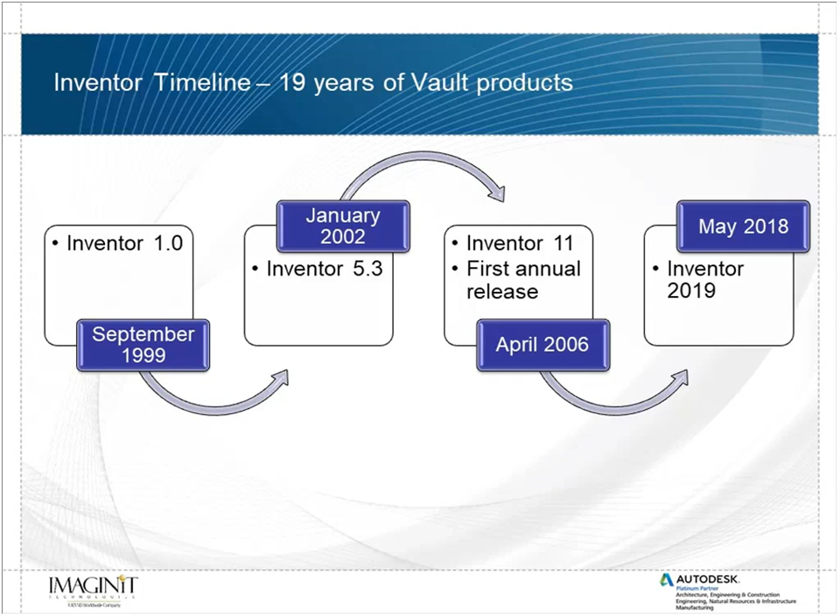It's always interesting to me to look back and think about the different tools, how they've changed and what's been updated over that course of time as we've gone through.

I'll talk a couple of things about some of the enhancements and where they come from. If you're not using this today, there's a tool on the forums called the Inventor Idea Station. Many of these enhancements are directly from customer requests, where customers had suggested something, maybe taken a look at a particular tool and said, oh man, it'd be great if... That's where a lot of this comes from. So I really recommend that if you have an idea, take a look at this Inventor Idea Station.

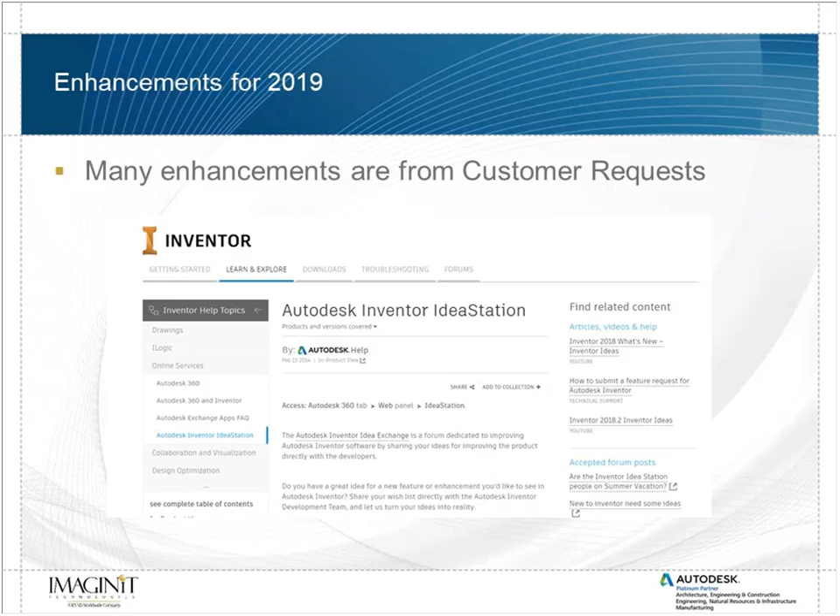Put your idea into practice. I have a lot of customers who ask me, can you tell Autodesk it'd be great if I have exactly the same feature you do? So go here, put your information in, and then you can send that out. You can give ideas kudos, so the more kudos something gets, the higher it goes up. Inventor's fairly responsive. A lot of times we'll see things show up and get a good response, pretty quickly get implemented into the software. When we say quickly, it's within a few releases - usually there are several releases out - but it's a great thing to communicate your concepts directly to Autodesk.

We'll start taking a look here at some of the new features within 2019 and some of the different tools that we can access. One of the first ideas of Inventor 2019 is how it's connected.

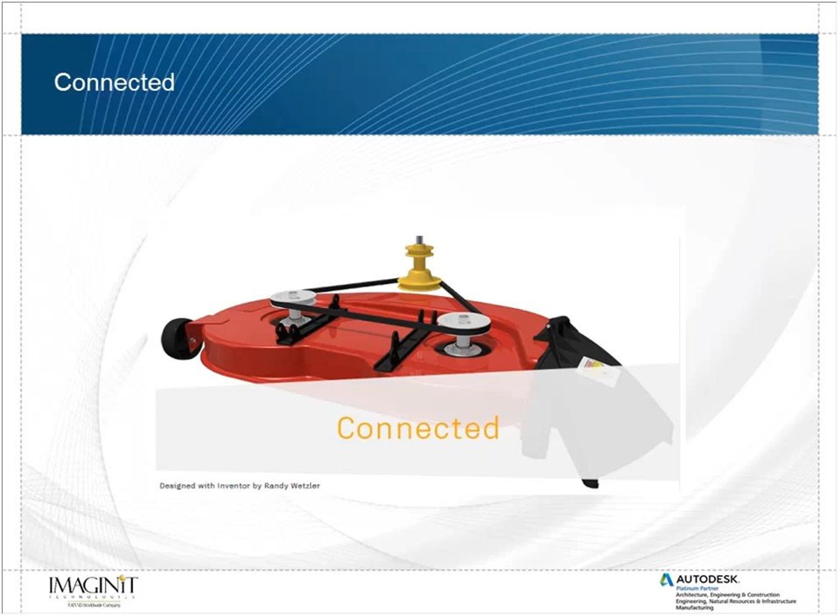I talked about this - it's a recurring theme within the 2019 products, because if you were on my Vault webcast yesterday, you heard a lot about this type of thing. The idea of shared views: to create a visual representation from within the desktop and give it a link that people can view. We've been doing this type of thing for a really long time.

We said, well, we've got a particular component, we're going to share this out to a DWF file, and then I can email that around, which is great. DWF files are a very powerful tool, but the shared views doesn't use DWF files - at least I don't think it does. I'm not sure what it uses.

It's all done online, so there's a tool, and I'm just going to share my desktop here real quick. At least I think I am. Yeah, here we go, so I'm going to share my desktop.

I'm going to jump over here. So here's Inventor, but I'm actually going to jump to Chrome real quick, and I'm going to go to this website, viewer.autodesk.com. This website, I'm going to suggest you take a look at if you haven't already.

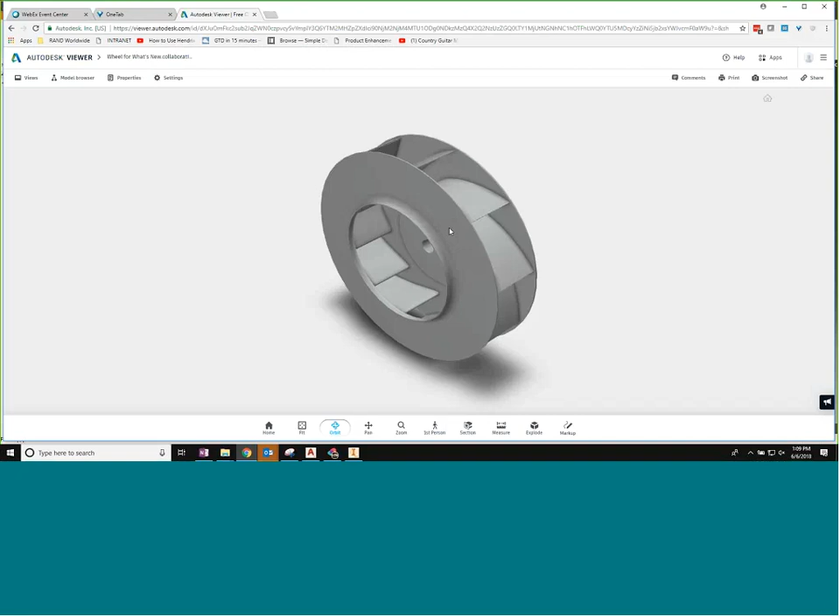It is definitely worth it - I'll go ahead and click Get Started Viewing here. I'm logged into this account, so these are views that I've generated already, I was generating them yesterday. I'll show you how this works. The idea is I can upload a viewable directly to this viewer.autodesk.com, it's all based off of my information. The viewable gets placed right into here. I can go see it, and I can take a look at it.

I can even come in, and if I've got this enabled, I can begin taking some measurements off of it. I can see distances and depths and some other things that are available for that. And I'll delete my little dimension there. So there are some tools available within the Autodesk products that allow me to come take a look at this.

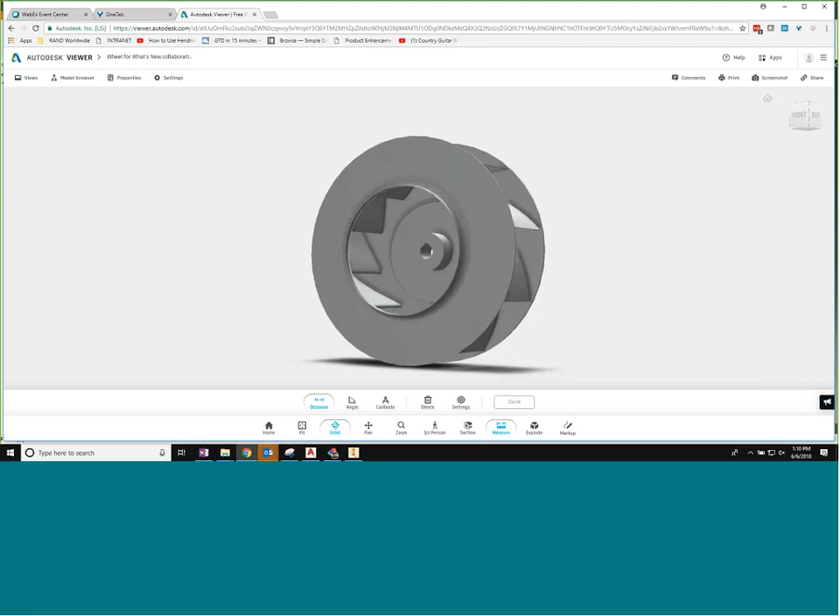I'm going to jump back here. I've got a drawing that I've loaded in, and again, this is right from the tool that I can send this up here. You do not need anything installed on your desktop to view this. This can be viewed in any browser, and it can even be viewed on mobile devices.

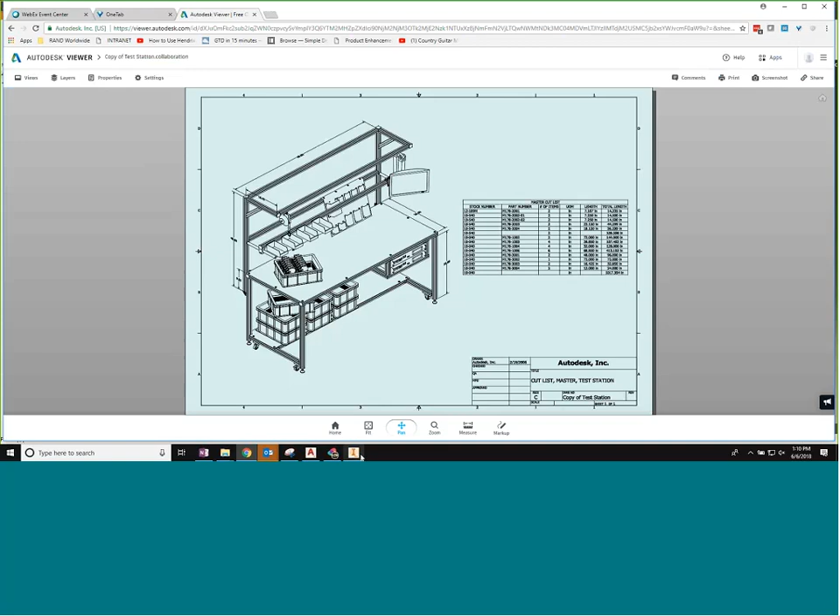Back here in Inventor, I'm going to go grab a component. Let's see, not that guy, not that guy. We'll grab this one. I'm just going to open up this piece right here real quick.

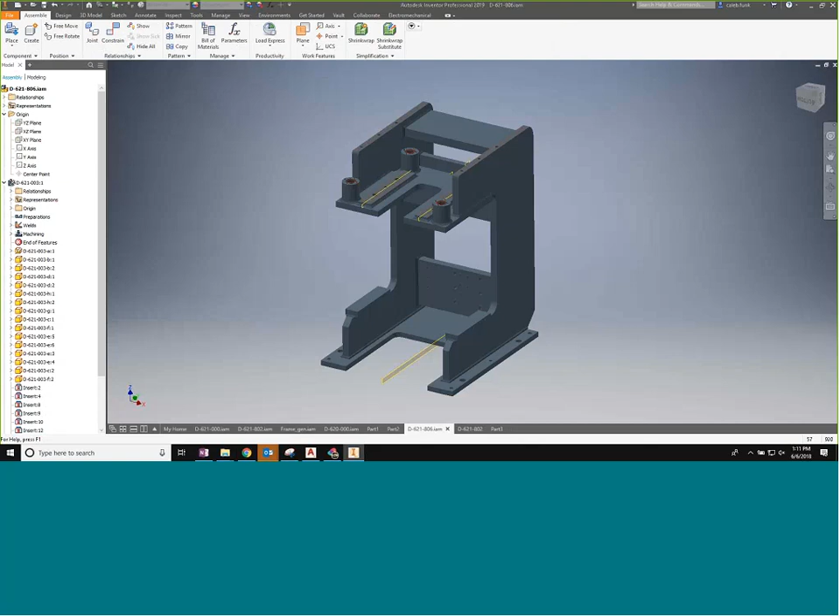If I want to, I have some options of how I want to work with this. In this assembly, you can see I've got my weldment, my different features, my different pieces that are in here. I'll go ahead and send this whole thing. I've got a collaborate option, and I'm just going to go to my shared views, and it's going to show me the shared views that I currently have. Those are the ones I was just looking at.

So I've got the wheel, and I'm going to create a new shared view of this one. I've got a few options. I can hide component names, I can hide part properties, but I'm just going to go ahead and share that.

It's going to process it here in the background, so it's going to take a few minutes to push that up. But once it's up there, it's a link that I can share and send to people, and it's not going to require anything in terms of a viewer. So you don't have to have Design Review, you don't have to have TrueView, you don't have to have anything. So now I've got that up there.

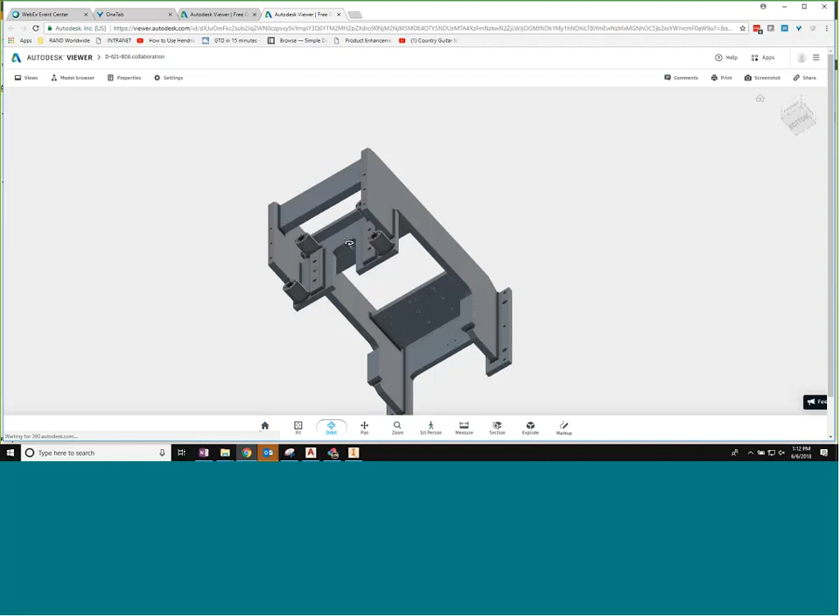I'll just go ahead and view it in the browser. So now it pulls up my Autodesk viewer. There's my information, so okay, I can come in and see that. There's all the info that I just sent to it.

It even has a model browser in here, so I could come in and turn different components on and off. I can go view specific components that are in there. Again, I can turn those off if I want to.

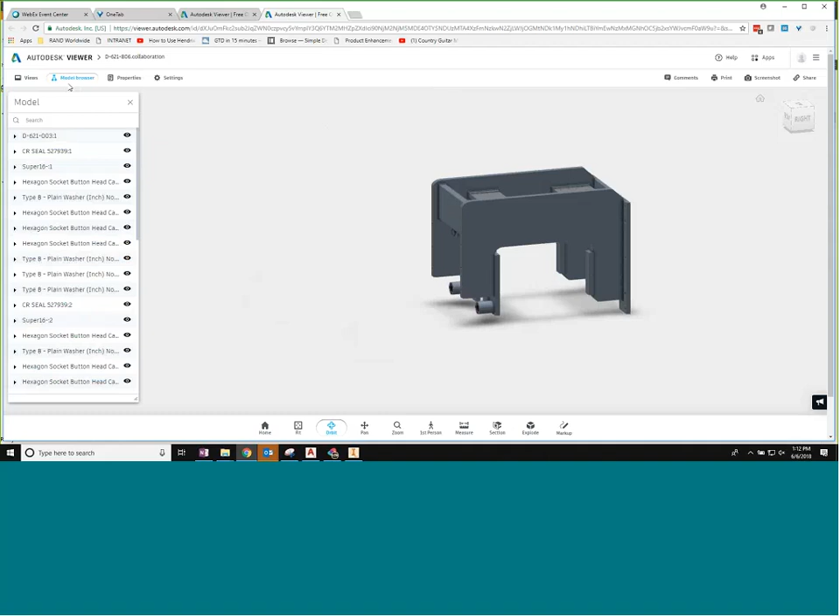The control that you have and the fact that this viewable is out here is really, really pretty cool. If I take a look at properties of a particular component, I can get its name, its appearance, whatever other properties I want to associate to that. All of that is built right into this. And I don't have any scenes or views in here, but I could pull those in as well.

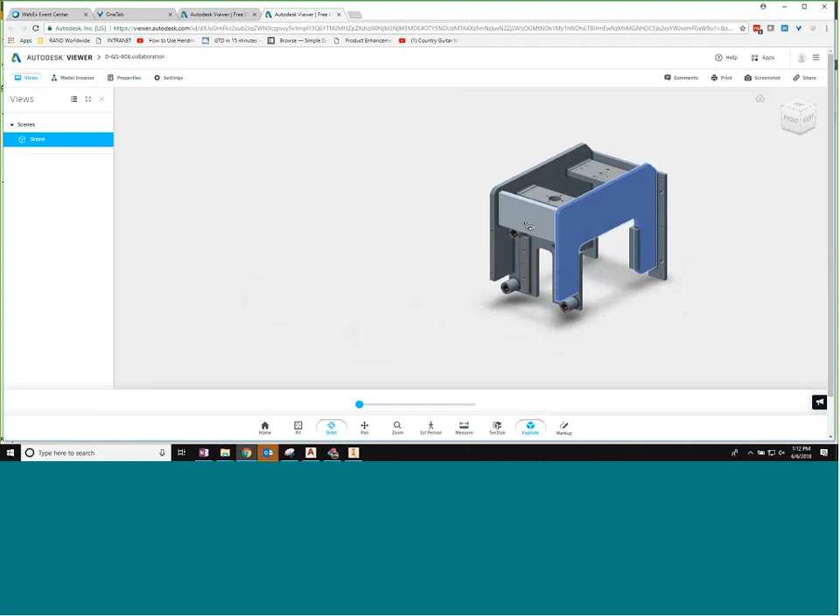So what a great tool to have, built right into a web client. And again, you could view this on an iPhone. I was playing around with that yesterday, and you can take a look at that on the iPhone.

So this is just part of the new Inventor tool suite that we have, the idea of shared views, and then I can publish out those shared views. These do automatically expire in 30 days, and I can extend it or I can delete it.

So if I want to share that with someone, all I have to do is copy the link. So I'll just copy the link that I have, and then I'll drop back into our WebEx meeting here. And that's something that I could then send out to everyone if I wanted to. So I'll just send that link out. So if you wanted to take a look at my information, it's pretty straightforward to jump in and take a look at that. And it's a great, great tool that we have.

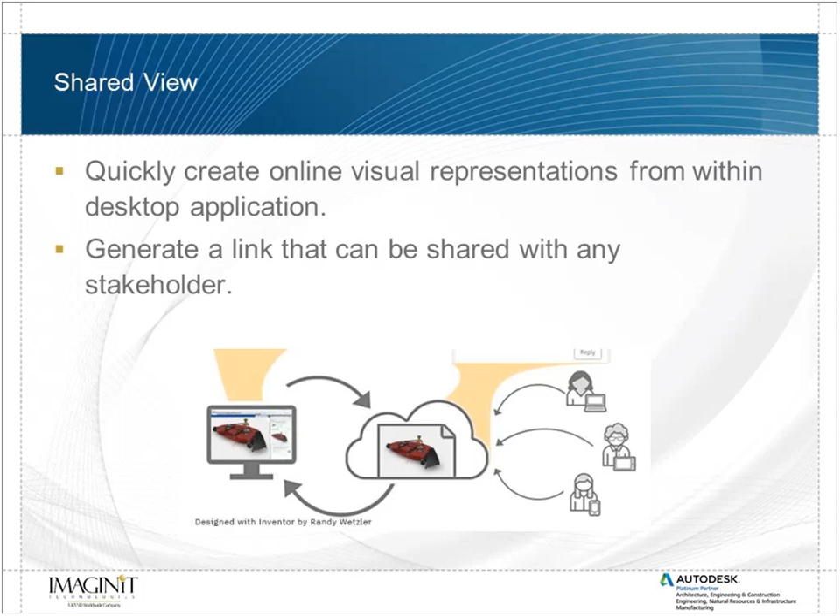That's not the only connection tool that we have, though. There's also Autodesk Drive, and Autodesk Drive has been around for a little bit. But now it's getting deeper and deeper integrated into the tools where we can send files directly to Autodesk Drive. It's a subscription benefit, so this is allowing teams, usually smaller teams, to share data pretty easily.

The idea behind Autodesk Drive, if you've ever used Dropbox, you've got the basic idea. It's a location that we can send files. You can create new folders, you can move that back and forth. But part of the idea behind it is it's CAD aware, so it understands if you open an assembly that it needs to get all of the other parts that go along with that. It needs to get some of the other information that links to that and how that needs to show up. So it's a great series of tools that you can use to share that information, to publish directly to it so that we can call up what we need.

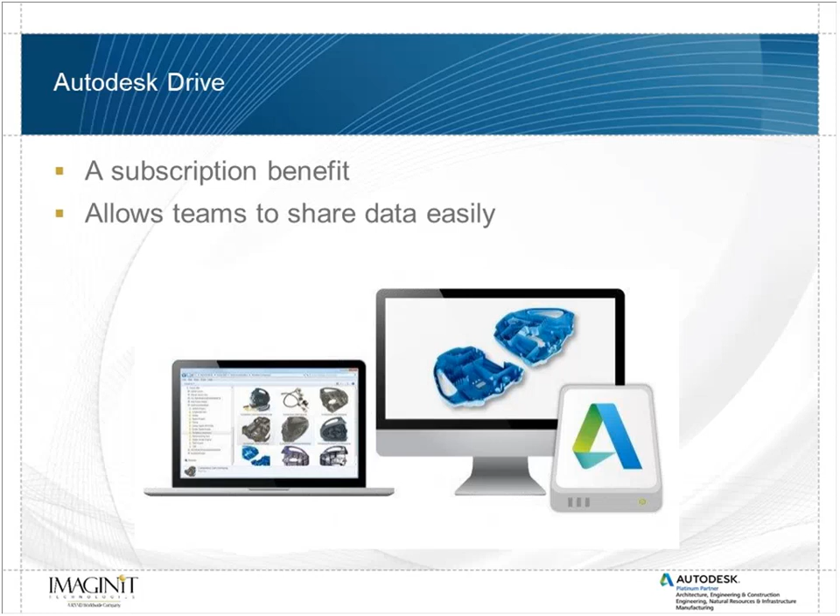Along those lines with Autodesk Drive is also the idea of AnyCAD for Fusion. Fusion 360 files are now part of the AnyCAD option within Inventor, where we can open that AnyCAD information right within Inventor, or open Inventor files within Fusion. They can go back and forth. We can also use the Fusion 360 drive to share that information and collaborate.

The idea of a connected Inventor is really powerful. The shared views and being able to access the information on the drive is a great benefit of subscription, and a great way to access that. As I pointed out with Vault yesterday, this is a big thing. Being able to share information beyond just our engineering group to external stakeholders is a really common request we'd have.

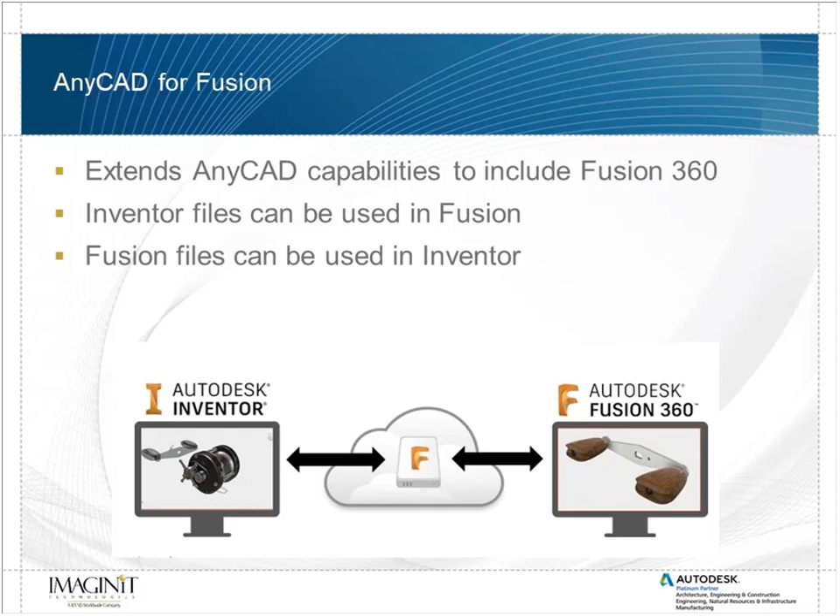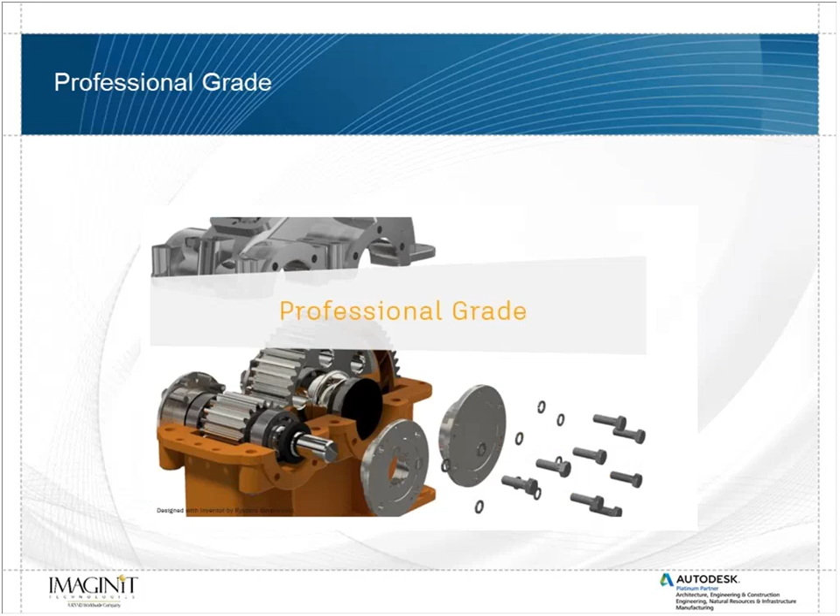Inventor 2019 is also a professional grade tool, and there are certain things they've done to facilitate that, and I want to talk about a few of those as we go through.

One of them is just enhanced performance. This is always difficult. I love when I have a presentation to do and they're like, hey, it's faster. It's always kind of hard to demonstrate, because it's hard to gauge that part against your part or whatever else it is. But I'll talk about a few things that, as I've been working with 2019, have really stood out to me.

There definitely is enhanced performance on assemblies, and this is something everybody has been asking for. It seems like as soon as people got Inventor, they started pushing how big the assemblies could be. So just the pan, zoom, rotate with an assembly seems to have been enhanced, and it's much easier and more fluid.

In-place edit has been a big deal, editing components in place is much easier to move between. Design views, I have really noticed that - switching between different representations is amazing how quick that works. Positional representations have had huge improvements in performance overall. Adding section views, assembly features, Express mode has a few more options available, and being able to drive a constraint - all of this has been enhanced overall.

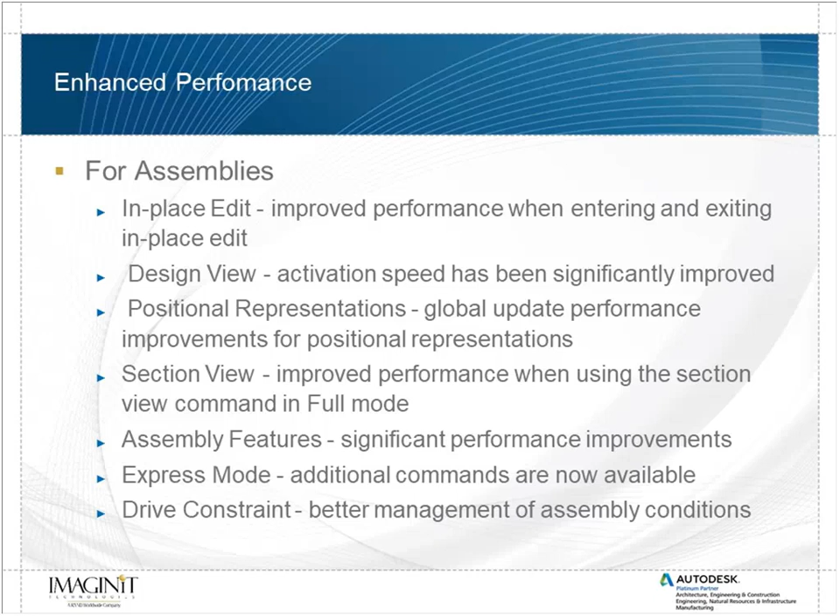What's interesting is it wasn't just within assemblies that they've added this - it's also within drawings. View creation in general, starting out with views, hidden lines removed, shaded views, view navigation, updates for views that include level of detail, design view, positional representations - projected views are much faster. And if there's a reference part that extends beyond the view margins, that has been significantly sped up in terms of how it's reacting.

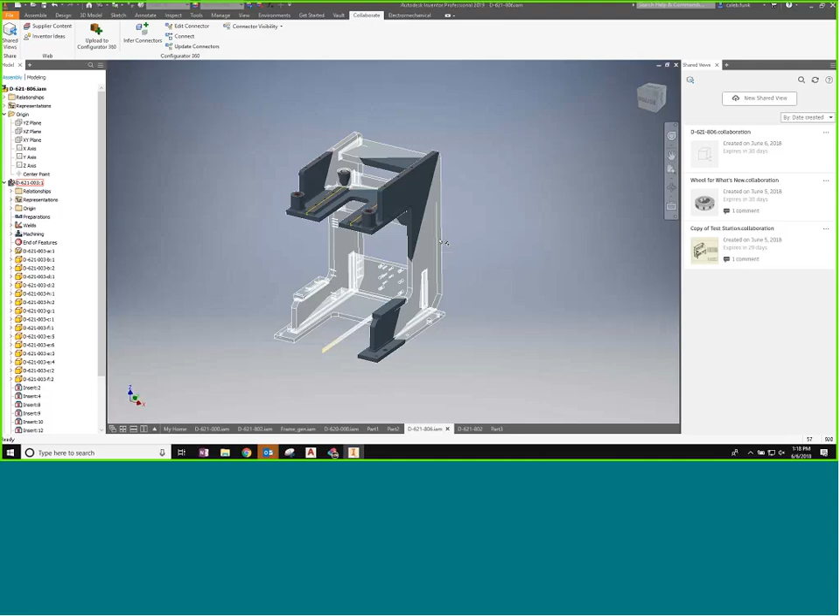Okay, so I am going to share my screen again. This isn't always easy to show necessarily, but I'll grab this assembly that I have - it's a fairly sizable assembly. I apologize, I'm going to shut down my shared views. One quick thing before I do - this shared views is a palette and can actually be incorporated, like I can have a model palette and a shared views palette right over here as well. I don't need this anymore right now, so I'll shut it down, but it can be incorporated, and we'll see more of that functionality in a few minutes.

So if I'm looking at this particular assembly, I've got 15,865 components, just 920 unique ones though, so it's not huge, but I've got a lot of information in here.

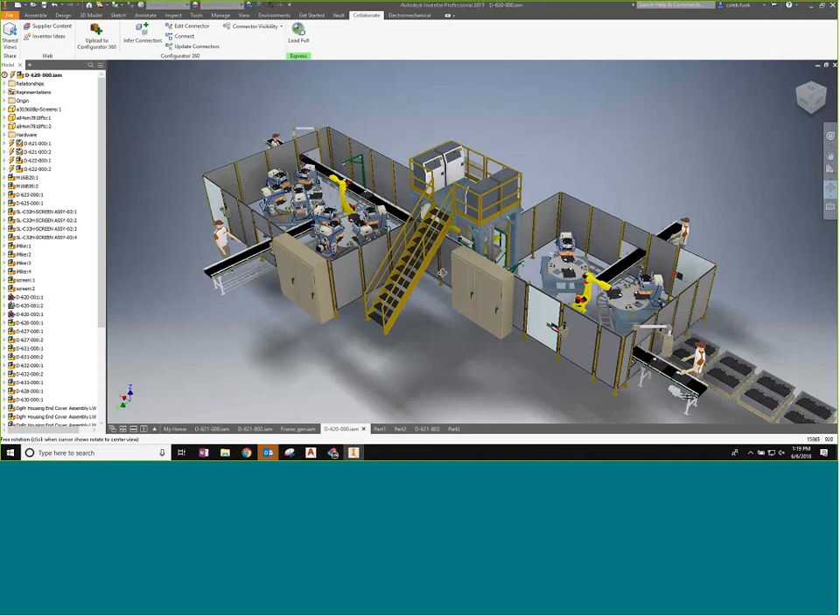And just the ability to move that around, and hopefully it comes through in the WebEx the way we're seeing it here, it's just smoother. Once my shadows shut off, my gosh, it's just much easier to work with in terms of zooming in, zooming out, and manipulating all those different things.

If I go here and take a look at a view, this was something we might run into from time to time where it was difficult to look at the information, understand what's going on, view it, those types of things, and that has just become much, much smoother overall.

I'm going to do a section view in here, and doing a section view in an assembly of this size is probably not something I would want to try. It just takes a while, but notice how quickly it responds to my section view, and even as I start to adjust and change it and pull out my depth, I'm getting a lot back.

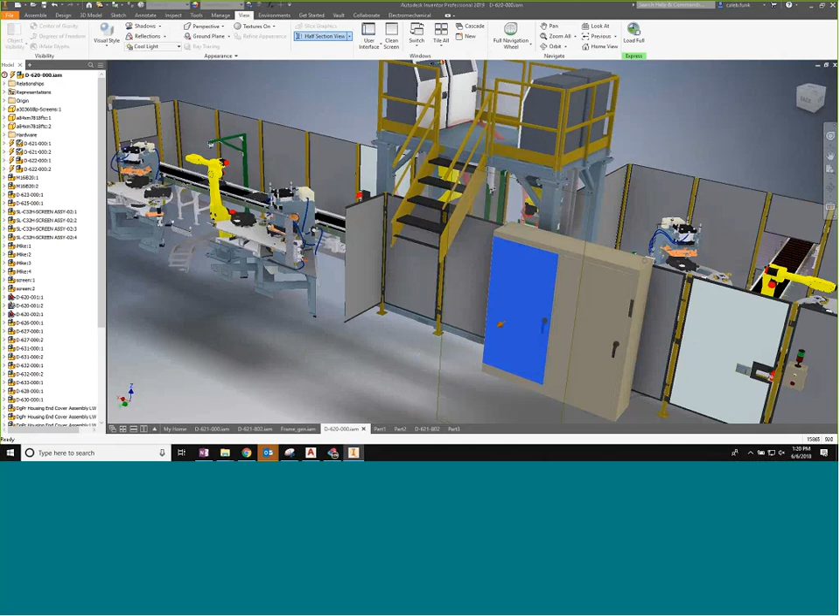The feedback is just much more responsive than what we'd see before in previous releases, so we can put that information in. It's just nice that they've updated that. I don't know exactly what was changed for that to happen, but the idea of an assembly of this size, being able to pretty quickly view it, see the information, move around it, is definitely significant.

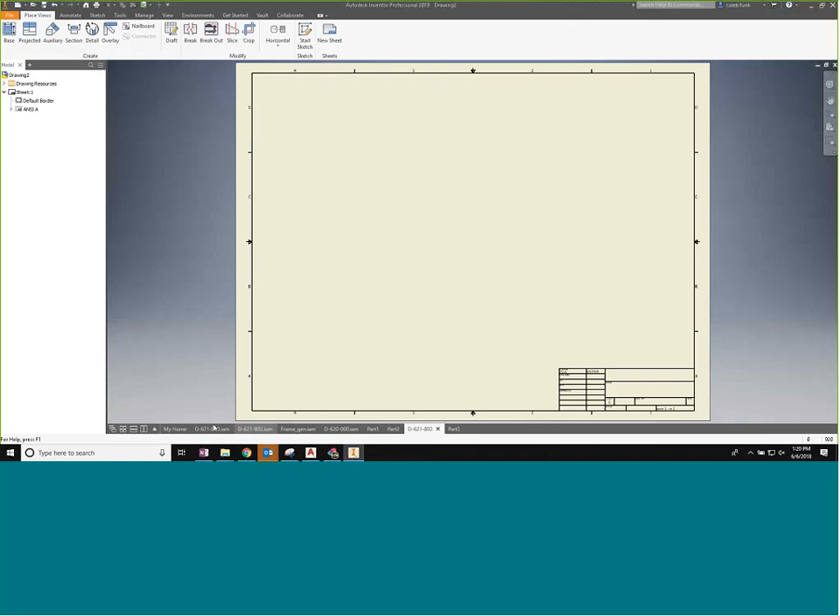Now I'll jump over here. I've got, let's say, I should have this larger one. So I've got an assembly here - this is 727 components, a decent amount open that I have right here. There's a lot of different pieces, parts, different things going on. You notice I've got all this different tube and hose running around it.

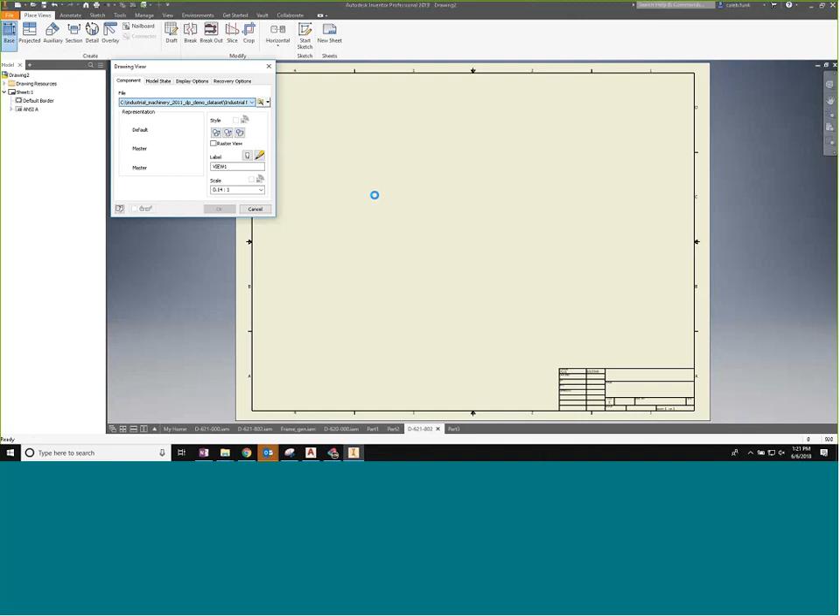Well, what I want to take a look at is creating a drawing off of that. So I'm going to bring in my base view, and we'll do that 621.802. And you'll notice it just, boom, very, very fast and smooth in creating that. So it's not the biggest assembly I've ever seen, but as we take a look, we've got a fair amount of information, and I want to adjust my views and get everything just the way I want it.

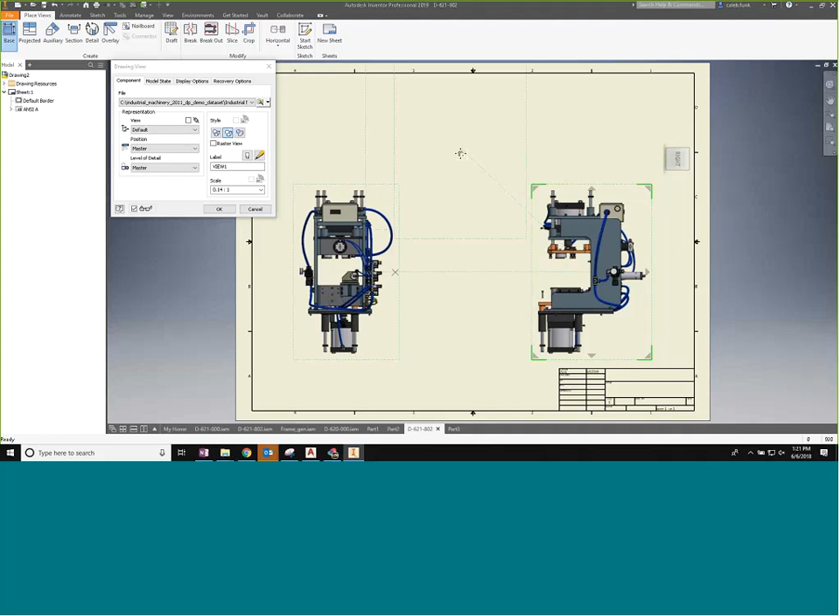So I'll say, yeah, it looks good. We'll move that guy over here, and then I want another view over here, and I also want an isometric. Actually, we'll change that isometric in a second. And oh, good night, I canceled out. Let's try it one more time.

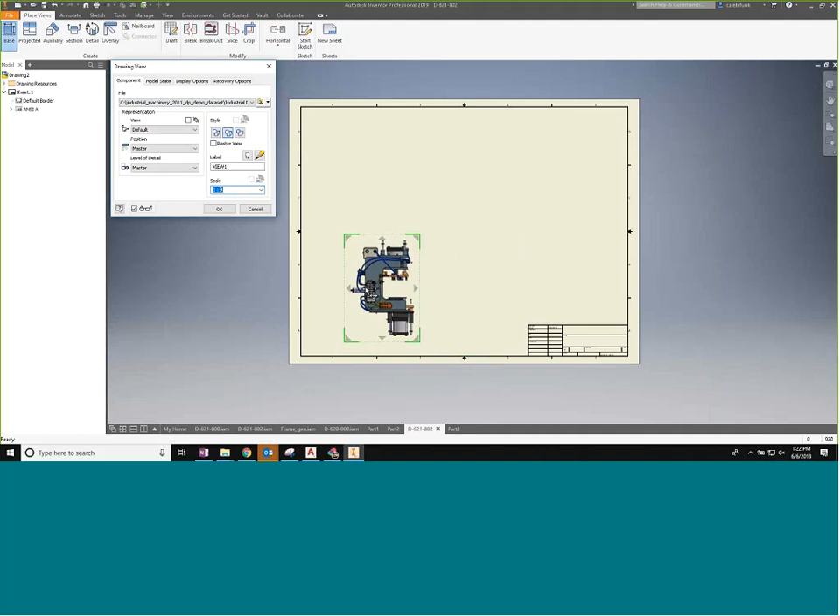So I'm going to go grab my view that I have. Again, pops right in, and we'll run it this way this time. That sounds good. We'll say, yep, I want one of those right here, but it needs to be a little bit smaller. So those in-place editing tools we saw in previous releases - you can see how quickly those come in and accept that.

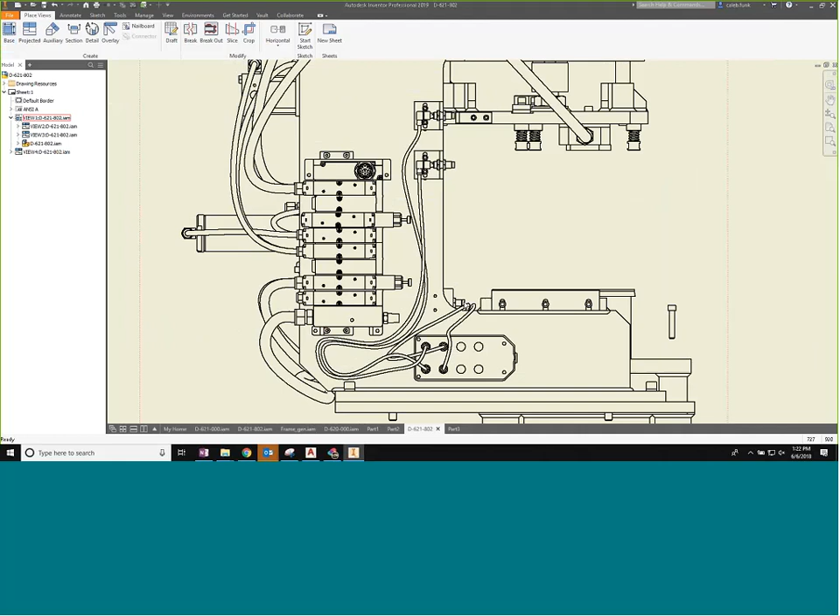I'll just go pull my different pieces. Now I'm going to want a different isometric, so I'll go kill that one. But you see how quickly it does the hidden lines, does the information, and right now I'm ready to go. So this has a lot of info going on with all those hidden lines and all that information, and it's just faster. That's all there is to it.

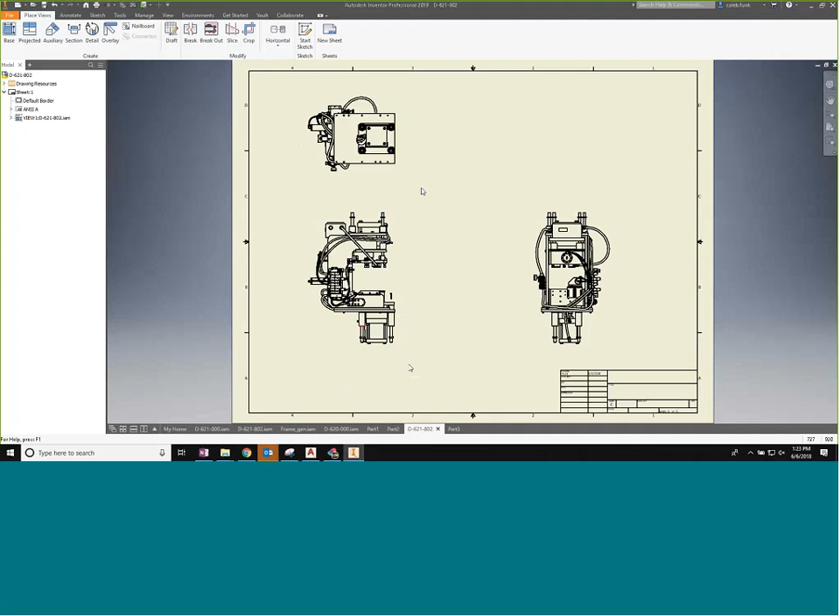The response is so much better than what we've seen before in previous releases we've worked with. So again, I don't have any specific benchmarks where I've said, oh, in 2018 it took this long and here it took this long, but it does make a big difference in placing information, manipulating it, moving it around, seeing how things update as we go through the models. So just a great addition to that professional grade idea of Inventor.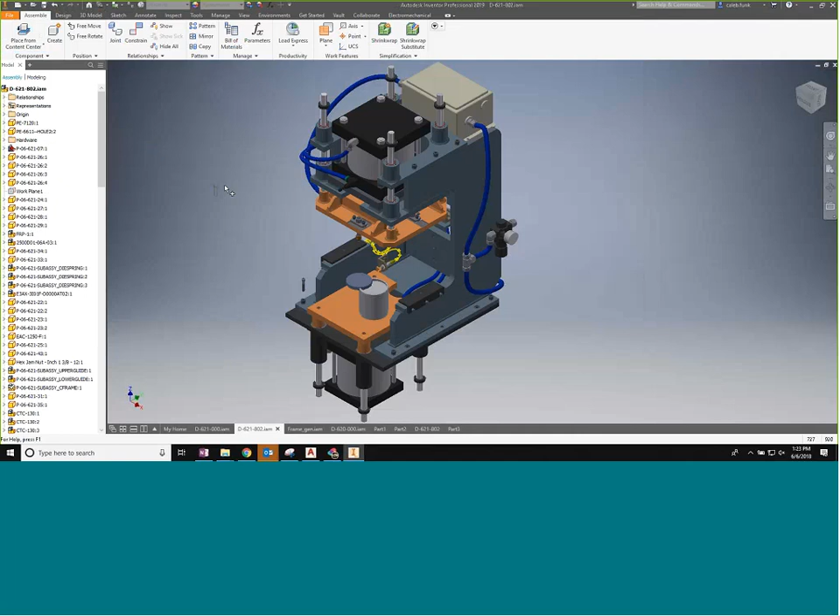One other thing I'll mention, a little different than what we've done before: if I go here to Content Center, one thing they've done is change the way Content Center remembers parts, and this is what I'm talking about. I'll place this component in, and it didn't take very long, but you notice it went through and generated that component, and it asks, okay, what size do you want?

And we'll say 820 here, and it generates that component. Content Center, of course, is just a library of parts that generates it on an as-needed basis.

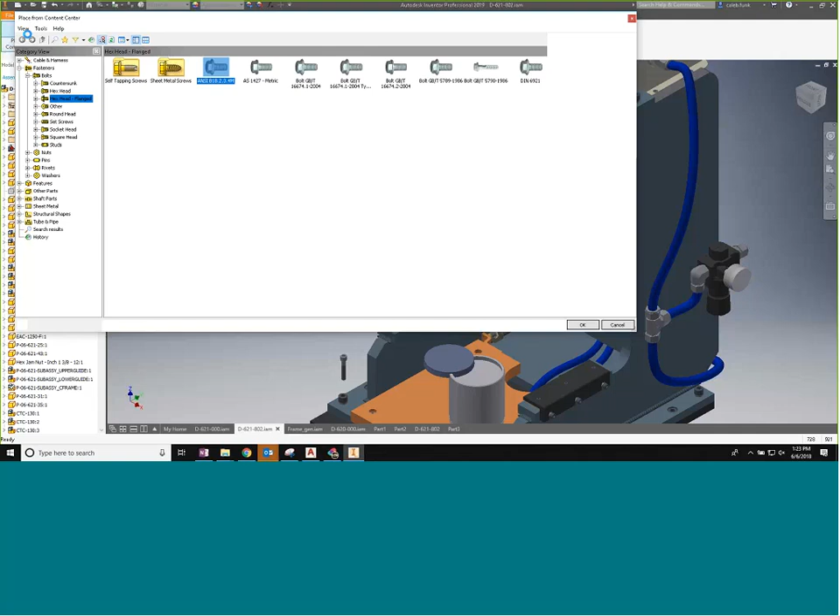If I go right back there, I'm just going to place that same thing. It is in memory. It's not going to have to spend much time remembering that component. Okay, so it's an M8x20, done. It caches it so that we can use it again and again.

So it caches whatever Content Center parts I pull within a session so that I can very quickly pull them again. Because it seems like we're always saying, oh my gosh, I need another one of those screws, another one of those. And it's not taking the time to look at the database for it. It's just cached in RAM, and so it can pull it out.

As soon as you shut down Inventor, that clears the cache and we have to do it again. But just wanted to point that out, that it does remember that information so that we can easily pull the same parts and pretty quickly go to that.

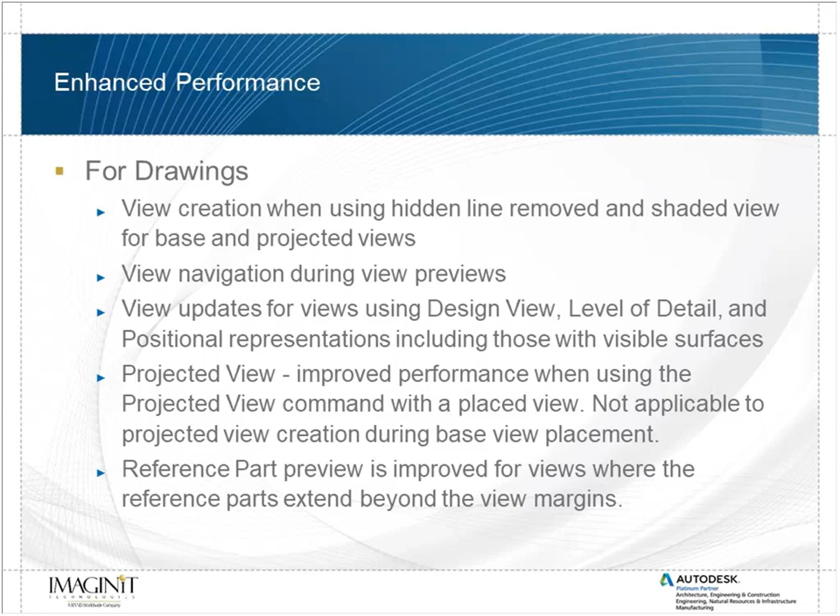So we talked about the idea of collaboration, being connected to the things, whether through the different views or the different information. Talked about the idea of just performance enhancements, and you will see that across the board. There's a few other areas that have come in with that make things a little quicker. But I want to talk just a little bit about the Inventor Experience here.

Probably the biggest change that we see in terms of functionality is the new hole command, and it is a faster, smarter hole command. This is something that I didn't know I needed until this showed up. So I'll go here to just, I believe this part. Yep, that one looks good.

So the hole command, of course, that's been there since Inventor 1, and it hasn't looked much different for quite some time. But I'm going to start this, and you'll notice that it is a tab built into my panel over here. So it's built right into, now I could float that if I wanted to. I can take that palette out, but I really like it just kind of built into here.

So now here's my hole properties. What do I want to do? Typically the first thing we would do is we would pick a sketch, or we would pick a cylindrical, or we would pick a location, but we always would go through and tell it what type we're doing. Well, I mentioned this hole command was smarter, and part of the way that it's smarter is just based off the geometry that I'm choosing, it's going to start putting the different sizes in.

Now this is metric, so I'm going to go ahead and make that 10mm hole. So I didn't have to tell it that the placement I was using was based off of concentric hole. I just chose that. And in the middle of this command, I can go place another one. I can say I want one there.

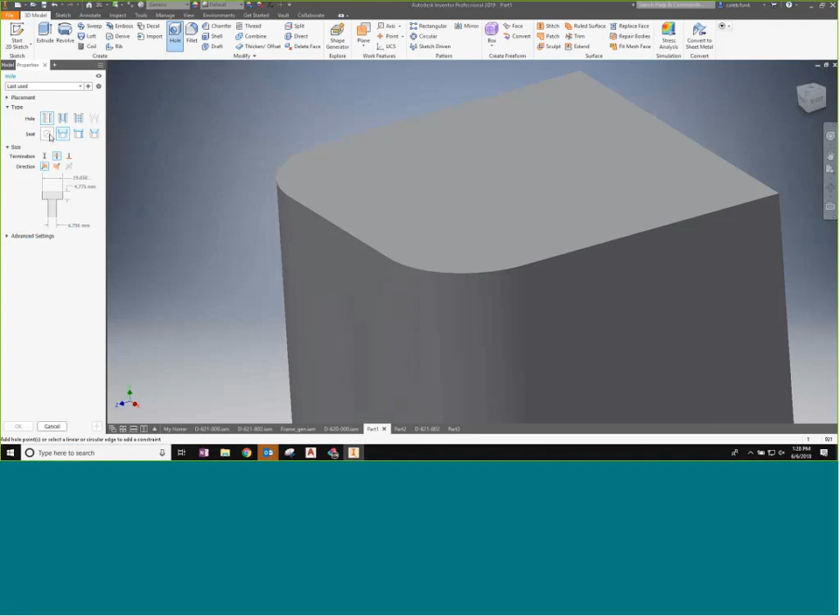Okay, so let's try this again. When I start the hole command, instead of the normal dialog box we're familiar with, we get a panel, built into the settings I have over here. The thing I think is so smart is that when I go to place it, I'll pick this surface and this edge. As soon as I do, it's a concentric hole—I don't have to specifically tell it that. It's just pulling this information based on my selections. If I pick it off of an edge, I'm working with the idea of having my information placed linearly, and I'll pick this edge and say 50.

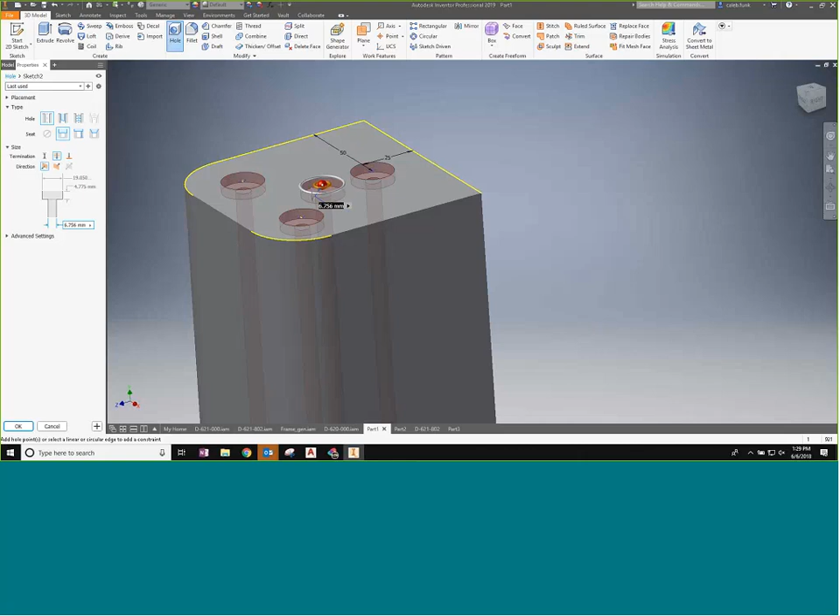Or I could pick a point and place it on a sketch, all right within here. If I want a different size hole with different information, I can create and just say, hey, new hole. It places those in, and I'm right on to my next one. Now I could come in and start placing a new one with additional information.

So I really like the updates. It's one of those things where I've been using the hole command for so long, I thought, well, I don't know what else they could do different—it basically has everything I need. There might be a few additions to my thread library or something like that. I was really surprised when they completely changed the way the hole command works, the way that interface comes in and how we can see all of that.

So it's a great tool, really powerful for using—I'll just manipulate this around a little bit. There we go. It's a great tool for adding that in.

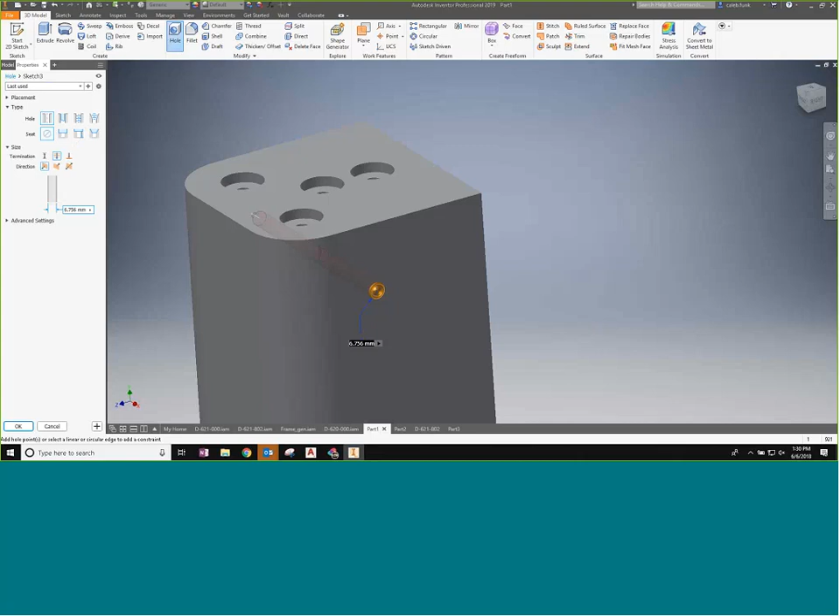And here's my prediction—you can write it down. Over the next several years, we are going to see more commands go this direction. I think we're going to see this sort of tabbed interface more and more. As we saw, some tools first appeared as a heads-up display, and now we're beginning to see more of it. I think this is the direction it's going to go—we're going to see more of these types of tools.

As I mentioned, my hole command gives me a single hole feature that contains all of those. Essentially it created a sketch in the background that contains all of that information. But instead of wrestling through and putting all that in, it's pretty simple to just take the hole command and determine where I want to place that.

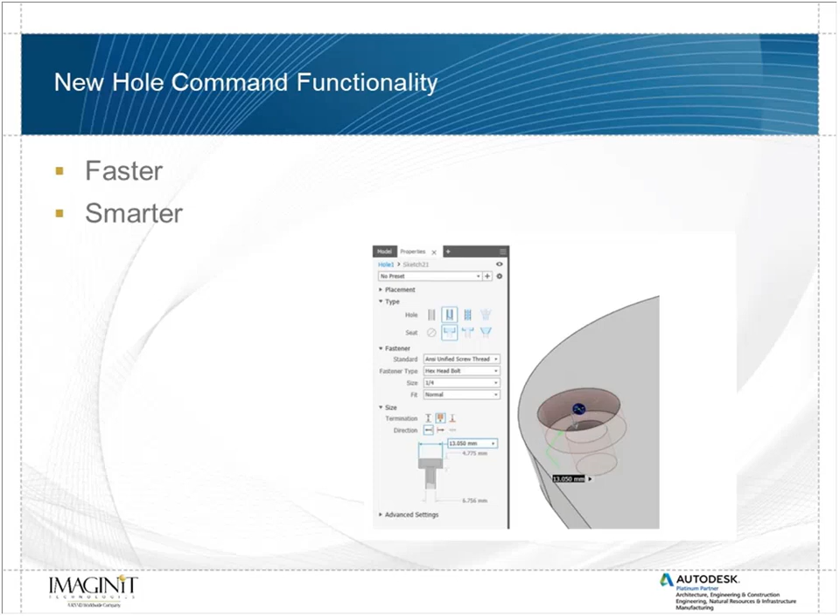So that's probably the single biggest thing. If you fired up Inventor 2019 tomorrow and took a look at it, the thing you'd say 'oh man, I can see a difference' would probably be the hole command. A lot of the others are subtle, behind-the-scenes, quick ways to do things, but that's where that would come in.

Kind of along these lines—a new option we have is the idea of an inverted fillet, where we can have concave or convex fillets. It's just an option within there, and I will make sure to share my screen this time. All right, that's where I need to be.

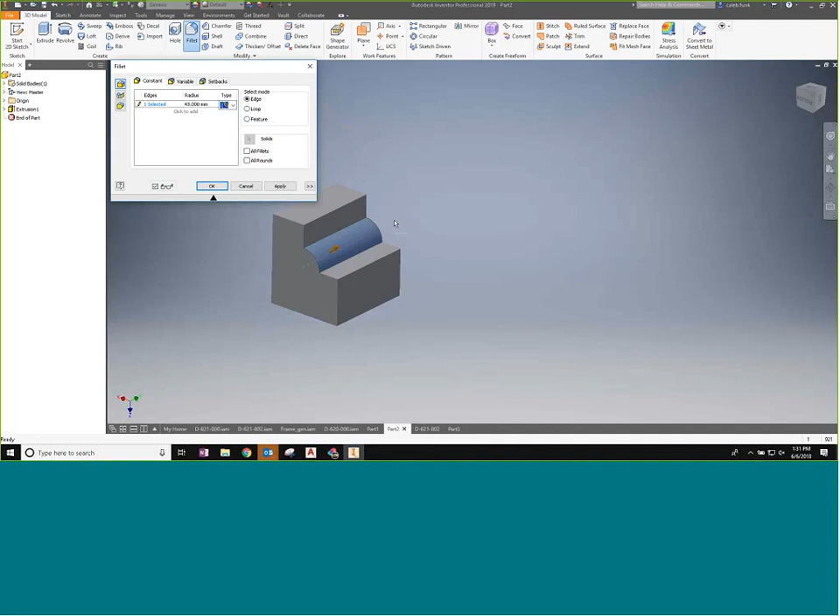It's just part of the fillet command. I'll select this edge and bump this out here. I can go through and switch it to an inverted fillet. Obviously there were ways we could do that before—take something and extrude it and give it that information. But this is just a feature in here that I can determine with each one I have: which way does it go, is it an inverted fillet, what size do we have, and we can control those different edges to push that in.

So there's my regular fillet, and there's my inverted fillet—it can be concave, convex. Instead of just rounding off the corner, we can put those in, just part of the fillet command, so it's controlled as part of that.

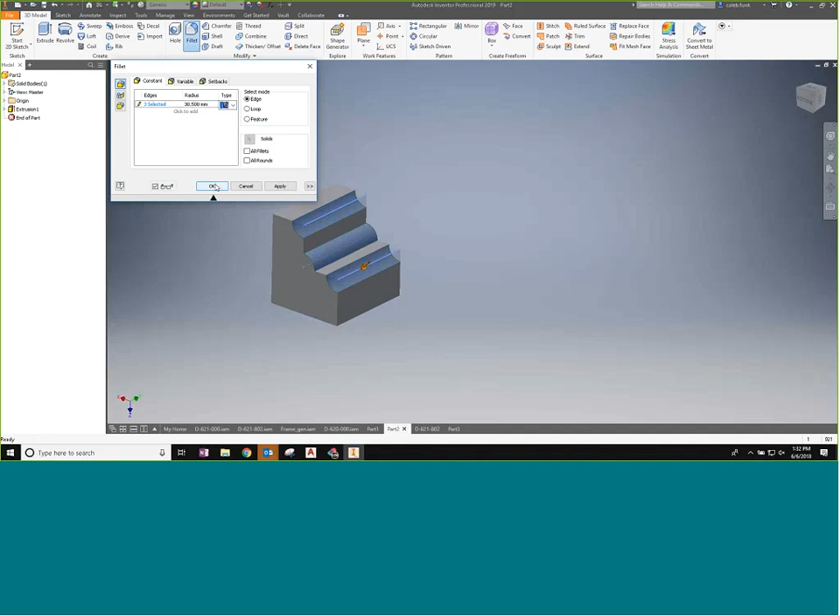So simple enough. It's just an addition more than it is a change to the tool, but it allows us to place that in pretty quickly.

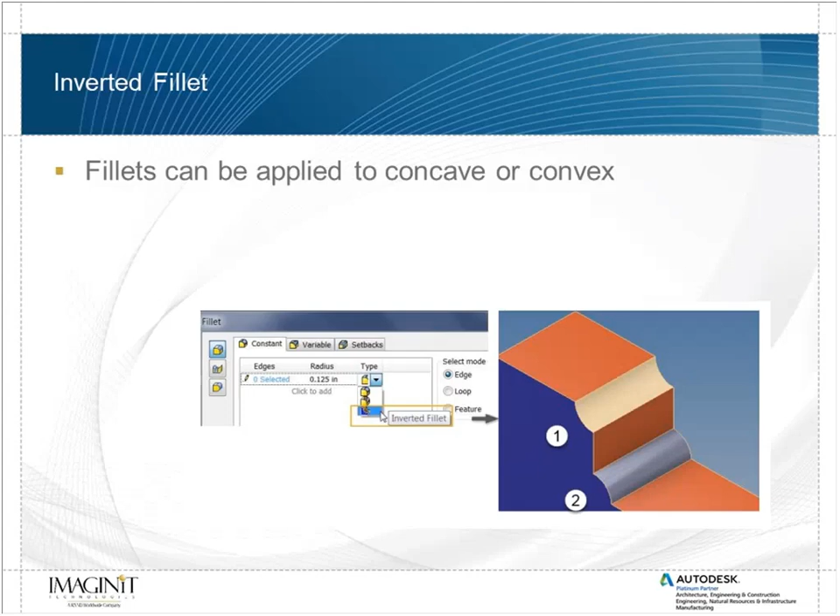With sheet metal, not a whole lot has changed. A couple of things they adjusted is the idea of mid-plane sheet faces, so when I put in a sheet metal face, I can determine how much of it goes to each side.

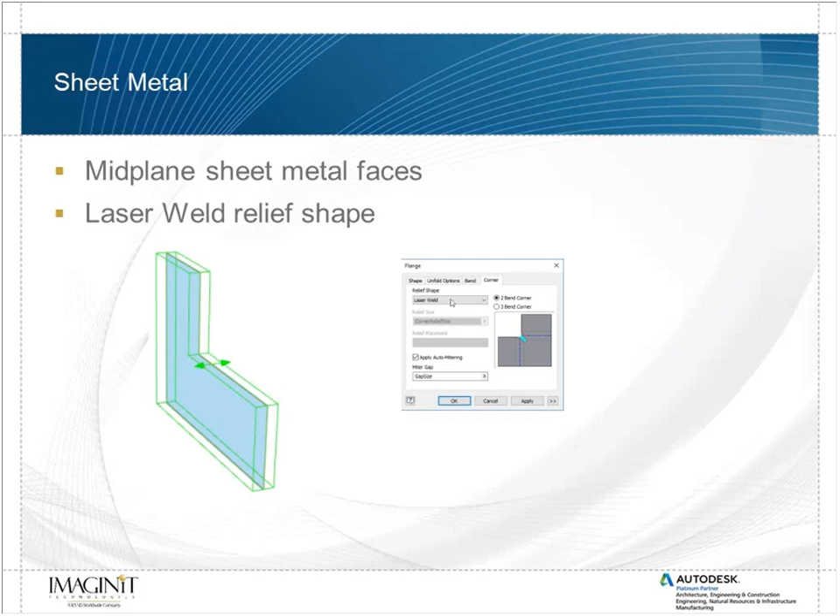One thing they did that was kind of nice was the idea of a laser weld relief shape. It's a new shape we have available, a simple shape, but really designed to work well with laser cutters, so that when we're laying this out and nesting it and pulling out a laser pattern, we'd have that information in there. It's just a simple addition, but it's kind of nice that they've done that.

Frame generator - now this isn't something completely new. We could get some of this information before, but cut detail info and the frame GL property that shows length, these were always parameters in our part, but they weren't iProperties. You could export them and set them up so they became iProperties, but by default they weren't. Now we have the ability, it's built into it - the length, width, height, those parameters, as well as cut length and cut detail information, are custom properties of the part automatically. We don't have to do anything special for that to happen, it's just built into it.

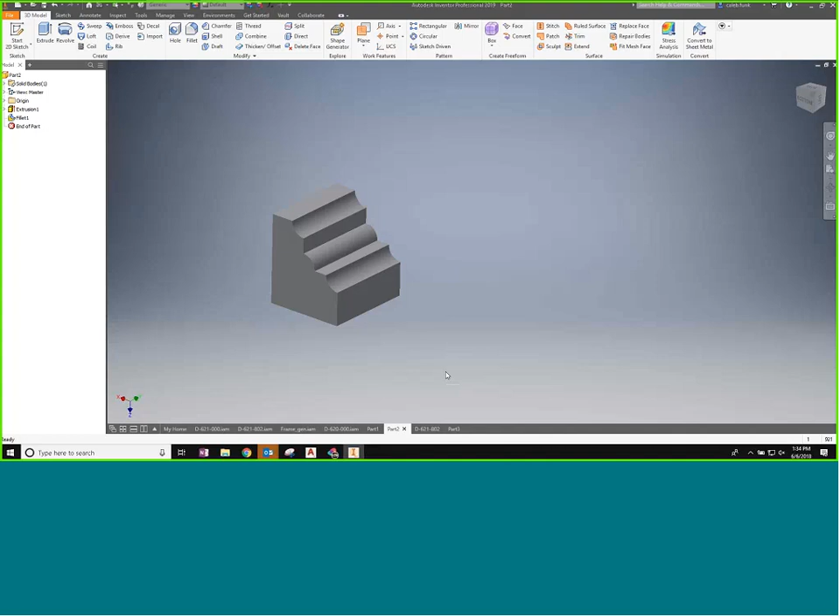So I'll go over here. I'm being very cautious to make sure I share my screen. And I'll take, okay, so I've got an assembly here.

I'll just throw in some frame generator parts on that so I can bring a few pieces into place. And let's get a member here - actually, I'm going to go with square.

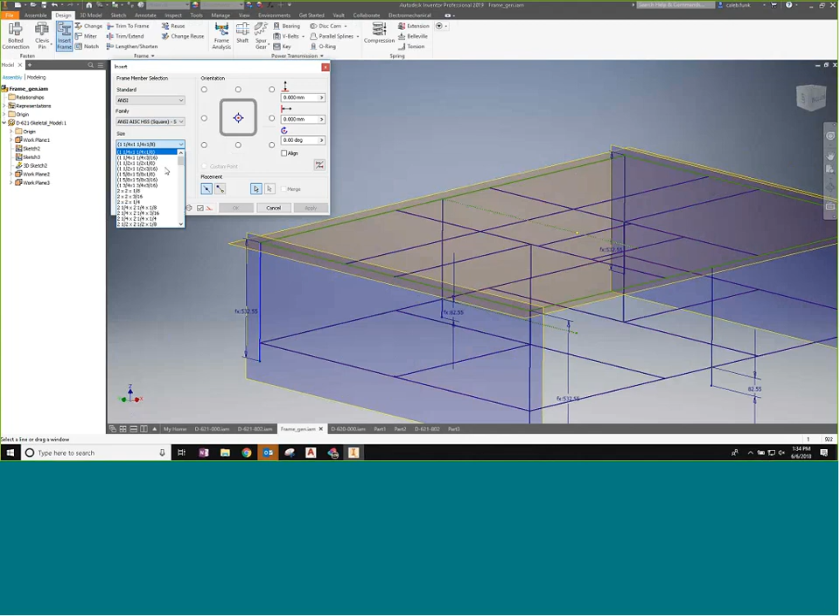And I'm not going to take this too far, I don't want to push all of it in. I'll say, yep, that sounds good. We'll start setting up the basic frame.

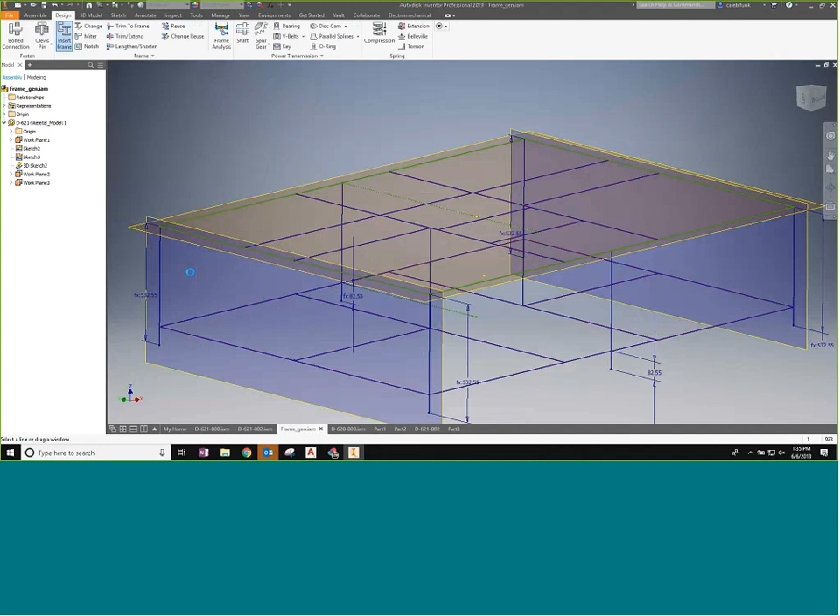So all that's going to work pretty much the same as what we had seen before. The difference is going to be once I apply some information, once I apply some cuts - maybe I'll just do a quick miter here to this end. So now I've mitered that, and then I will do a trim to frame here on the other side, and we'll take this and this - let's go that way.

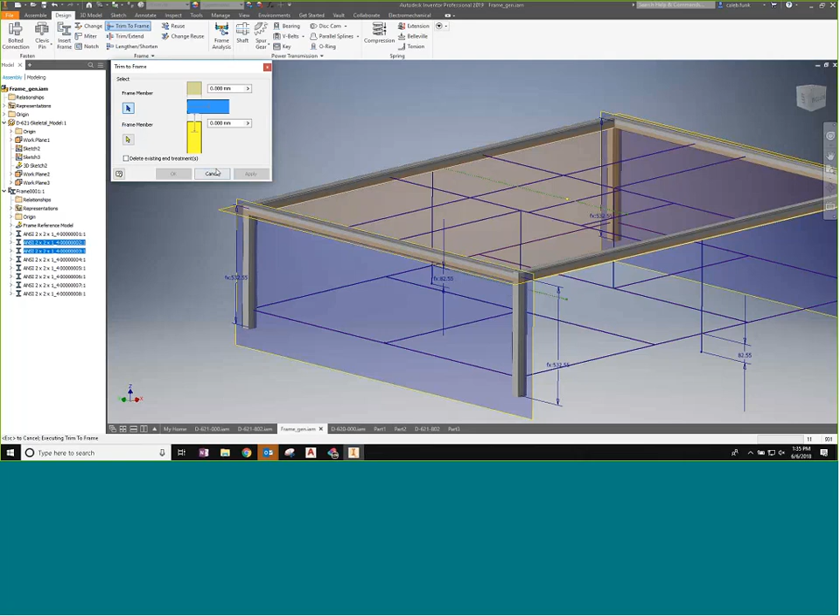Okay, so I've adjusted that up, so I've changed my length on that component that I have. And now I'll just go open this guy up by itself. So I've got a component generated from the frame, I've got a different cut length, different features on there.

And the idea is that in my iProperties, if I take a look at my custom, I've got cut detail 1 - it's a miter at 45 degrees. It knows that there's on this end that's already in there, so I can include that information in the bill of materials. And then my overall length that I have here does get updated - it used to not, if I made the cuts and made the information, that wouldn't get updated. Now it's getting updated accordingly. So it knows on one end I've got a miter of 45 degrees, it knows on this end I've got an overall length of this. It sees what has happened for that to take place and pushes that in.

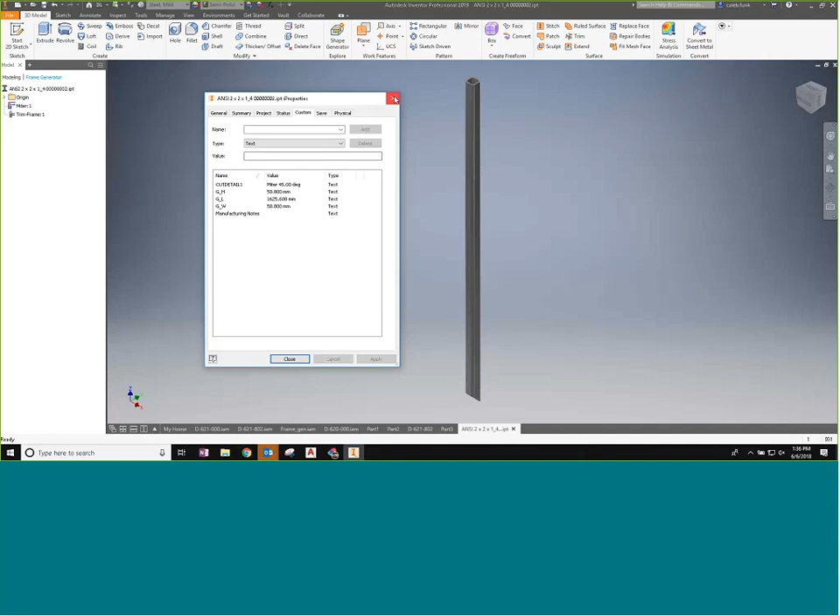Again, we used to do this - we kind of worked around this to get there, because we did have the idea of, as we were taking a look at our parameters, a lot of that's in the parameters. If I look at my custom parameters, I can see that information, we just had to expose it and do some things. The idea is it's already built into it now, and we do have that cut information that's part of that. So that was a pretty cool addition with how they wanted to set that up.

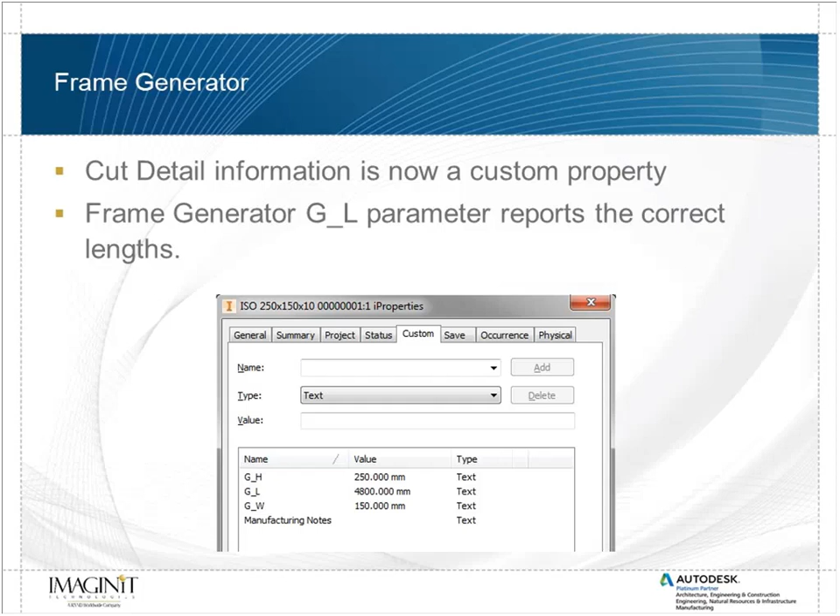Let me keep an eye on my time here. One thing is the angle constraint is now persistent, which took me a bit to figure out. I don't know if you've ever had an Inventor assembly with something held at an angle, then moved it slightly or inserted another component, and suddenly the 15 degrees you thought you were holding was holding from the opposite 15 degrees. That's essentially been fixed now.

So while they're talking about it as a new feature, really it's just something that needed to be fixed, and now they have. A couple other interesting things are the insert constraint and how it works, and the mate center line. With insert constraint, I can lock the rotation. Insert was amazing, but it left things that could still be rotated, so you'd end up with an assembly that wasn't fully constrained. Anytime you have an assembly that's not fully constrained and you add new components, there's a lot of math to be done.

So once you added in a couple hundred fasteners, it just seemed to slow down. Now we can lock rotation down, and it's pretty simple. The mate center line now kind of acts like insert does, where I can choose whether it's an aligned or opposed item.

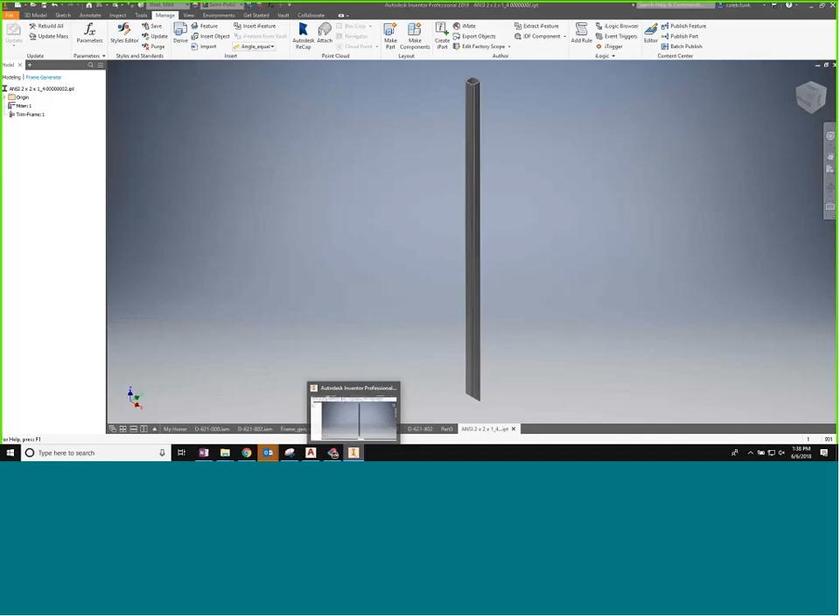So again, I'm going to share my screen. Cool, oh not that, all right. Don't need you anymore. Or do I?

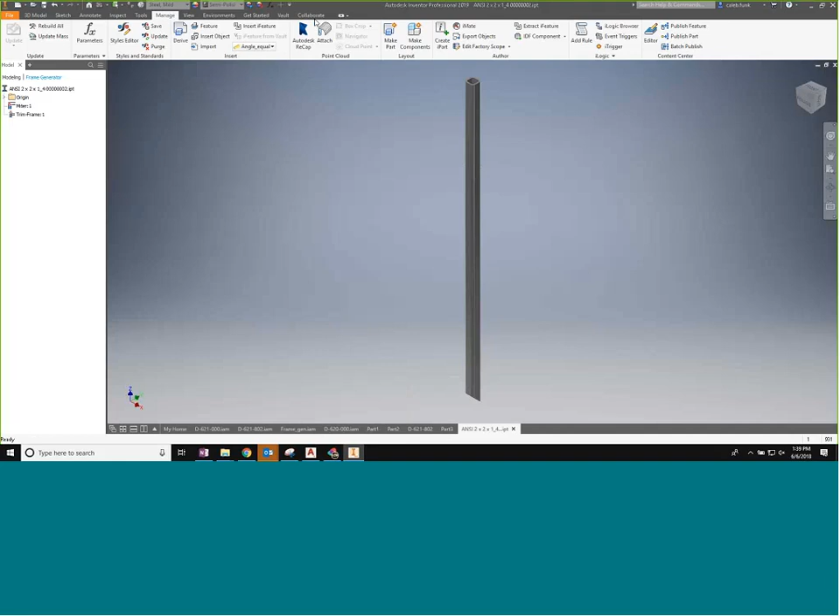Something is not where I need it to be. I can't get to my Inventor. That is super fascinating, hang on just a second guys. I'm going to stop sharing for just a second. There was a sharing window in the way of my Inventor. I'm going to try and make it not be in the way. Well, that is super strange. Yeah, I'm going to jump back into trying this a different way.

All right, I'll see if I can get that going. For some reason there's a sharing window that seems to be taking all the focus from my Inventor, and I can't make it go away.

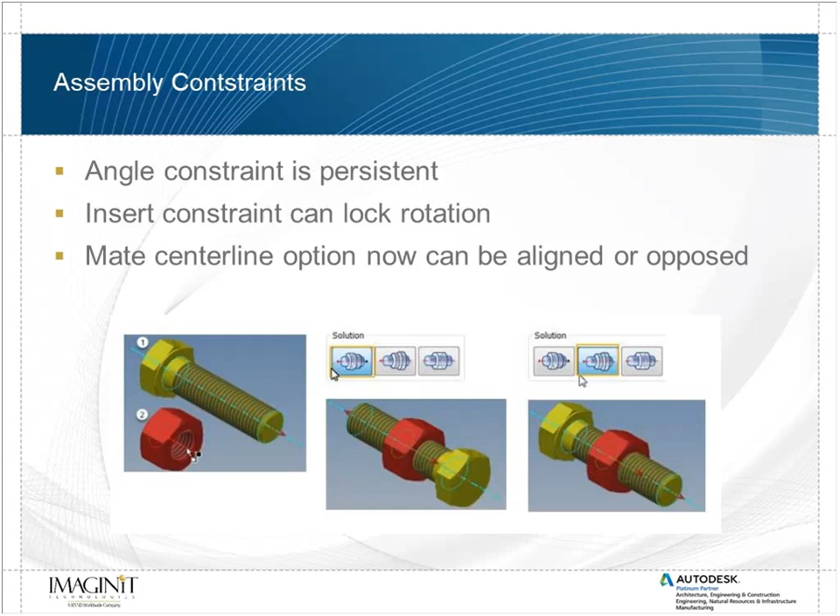A couple other things I'll mention while we're taking a look at this: the idea of custom color schemes. If you're a real hardcore Inventor hacker, you may have found this out a while ago, as part of the software development kit, you could get a custom color scheme. The custom color scheme would allow you to go in and change it so you had different colors, change your selection color, update that type of information. That's been around for a while, but it wasn't really supported within Inventor. Now you can go in and create your own color schemes.

I dug into this a little bit, and I'll tell you, there are things I have no idea what they are. There's simple ones like background, foreground, 2D sheet, things you'd want there. But you get a little deeper into it and suddenly it doesn't make a ton of sense - you're like, I don't know what this particular selection item is, I don't know that I've ever seen that color in Inventor. But the idea is you can generate your own custom color schemes. They're now part of Inventor and can move forward with it.

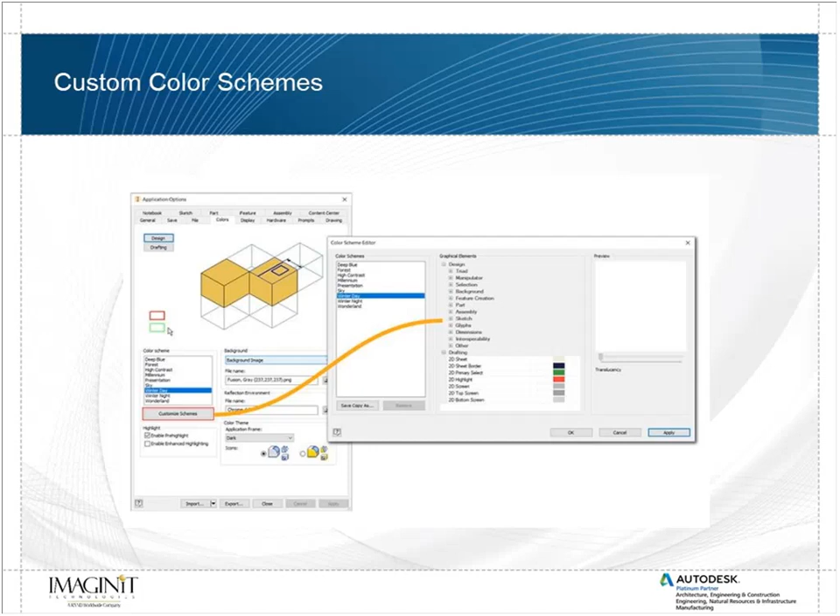All right, I'm going to try and share my desktop once again. I want to show just a couple of quick things, and then we'll come close to wrapping up. The idea of Inventor 2019 being a connected and professional-grade tool with a truly quality experience is what I wanted to try and get across today.

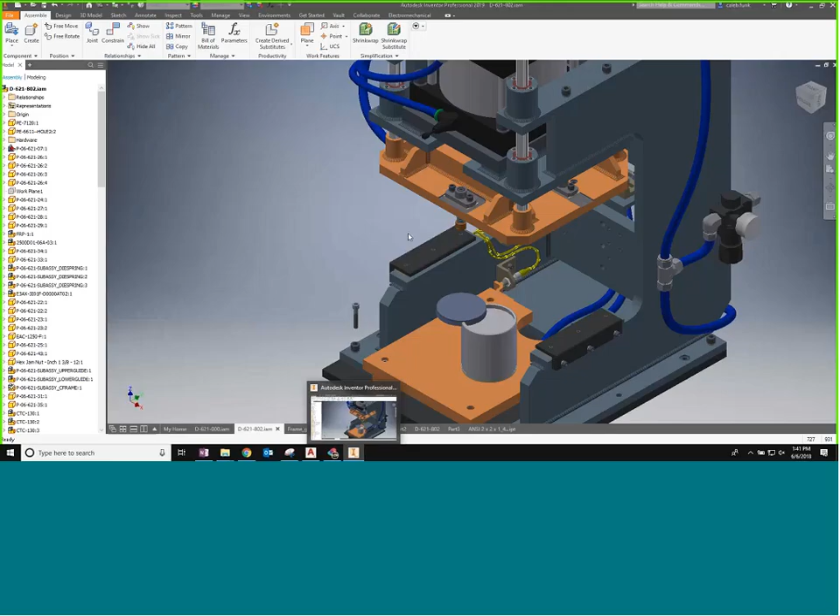So hang on just a moment, I'm going to share this. All right, I can get it now. Yeah, I had a sharing window that had focus, and I couldn't get to anything. It was kind of unusual.

Okay, so what I've got is I'll just do a simple insert. So constraints, just like we've always seen - really they borrowed this idea from joints, that's definitely where it came from. But I'll go ahead and say, yep, that goes into there, and it pops right over.

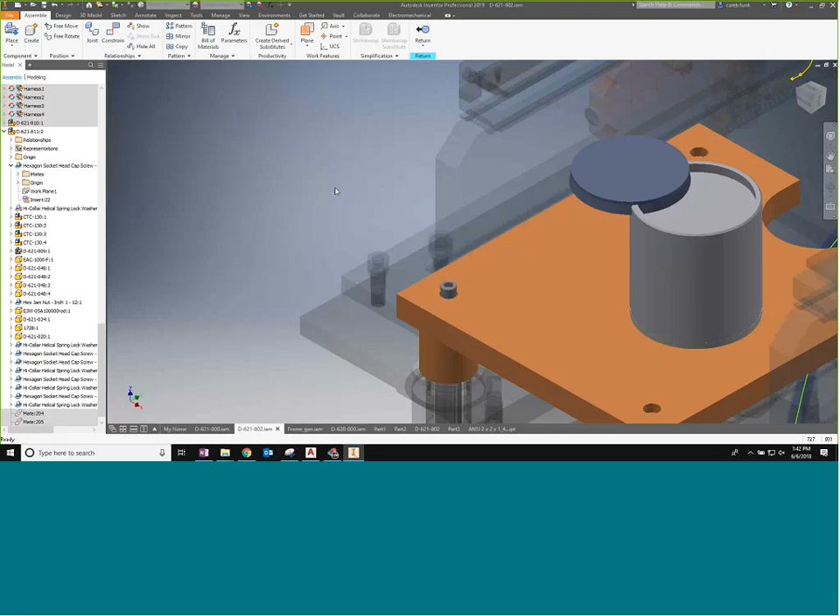Here's my option: do I want to lock the rotation on that or not? You notice I had it checked from before. It puts a little symbol on here so I can see that it's locked down. I can say yep, let's lock that rotation. Sounds great, and it does exactly what you'd expect, right? It's done, I can't rotate it - that's what I would want. The fact that so many times I've seen people put some sort of angle constraint on that to try and hold it into place, which worked, but it's nice that we can lock that down.

If you do show constraints, I'll show the constraints that are on that. It will pop up with my lock information so that I know it's locked down, and I can begin to see where that's at.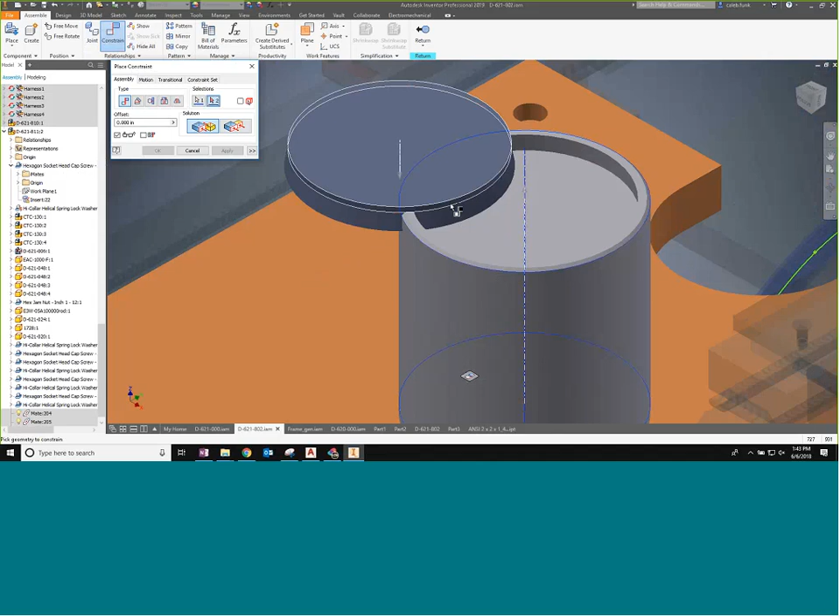The other thing with constraints is I'll do a quick constraint here between the center line of this. You notice I've got my normal mate tools right now, but as soon as I pick the center line of this, it says, do you want them opposed, aligned, right? So it's kind of the same idea. I can flip which direction that is, or I can do undirected, which just takes it wherever it's at right now.

I really like mate centerline to centerline, but I would get into that a few times where I would almost get stuck. I'd have to delete this one, turn it around using my rotate tool, then mate it back together, because it was just picking up the center line in whatever orientation it currently was. Now I can adjust that so I can flip it one direction or the other. I can choose which way I want to go.

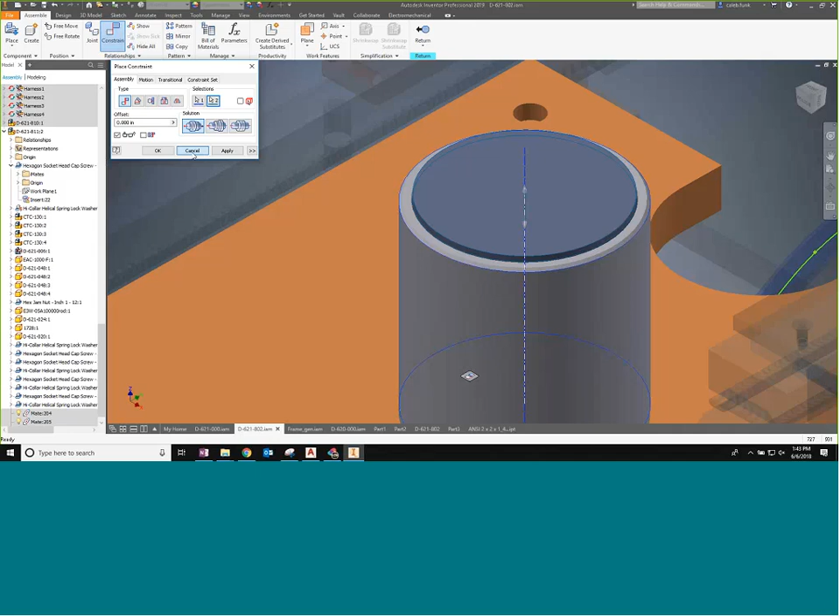And of course, I mentioned the idea of going here to my application options, yes, application options and colors. Just simple enough, there's my button, customize schemes. This is what I will mention. If I look at selection, there's tertiary select, auxiliary select. I have not seen a lot of these colors, or if I have, I haven't paid attention. So you can get right down to when you're creating a feature, what previews look like, all these different things, what that's going to look like, flat pattern, wire, color, all of that.

There's one thing I wish they had that they don't. I'll take, for instance, I deal with this Millennium a lot. I'm going to say new. I wish there was a copy button, but at least new does do, it's going to copy it. So most of the time I want deep blue, I just want one or two things to be different, or I want the sky representation, I just need a couple of things to be different. So what new does, don't waste your time looking for copy, new creates a copy of that, so you don't have to set everything from scratch. You can go through and make some adjustments with what that's going to look like.

The other thing I thought was interesting is you can adjust the translucency of any of the colors in there. So maybe I want it just to be this paler, more washed out color. You can adjust that information. So I just wanted to point that out.

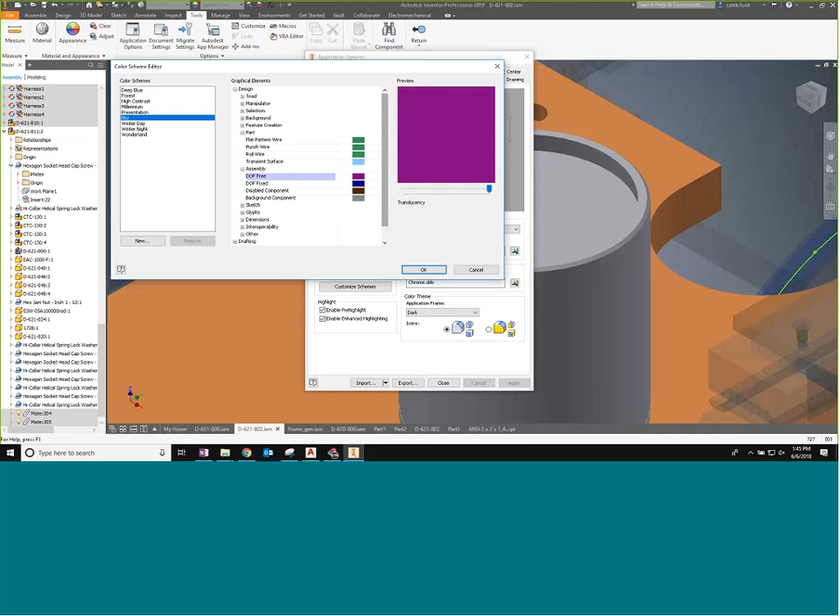I do want to leave a little bit of time for questions, but there's a couple of quick things I'll show here as I'm going through. I'm just going to return back up a notch, jump over to this part. There we go, we got this guy.

iLogic has actually updated a couple of things within it. One of the things it has updated is the ability to name a face. My selection window is messing with me again, I can't get a hold of it. So we can come in and name a particular face. Then when we do mates, we can tell it, it's not just a face, we could mate a cylinder. We could name all kinds of things so that when we're dealing with iLogic locking things together, we can add constraints between named faces. So it's just a bit of functionality they've added for iLogic that we can do that.

iLogic's got a couple other little things as well. If you would have noticed, as some of the point releases go through, autocomplete's in there. The idea of capturing the state is much cleaner than it was. So they haven't exposed any new functionality within iLogic, they've just made the experience a little smoother as we go along.